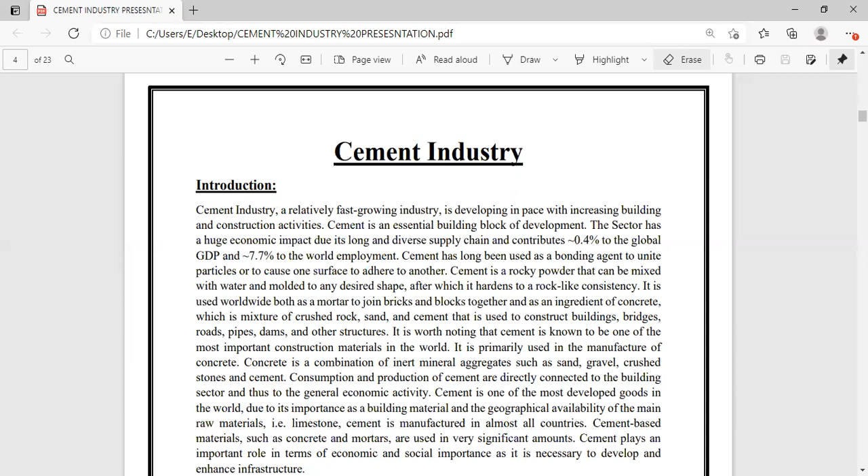Cement has long been used as a bonding agent to unite particles or to cause one surface to adhere to another. Cement is a rocky powder that can be mixed with water and molded to any desired shape, after which it hardens to a rock-like consistency.

It is used worldwide both as a mortar to join bricks and blocks together and as an ingredient of concrete, which is a mixture of crushed rock, sand, and cement, used to construct buildings, bridges, roads, pipes, dams, and other structures. Concrete is a combination of inert mineral aggregates such as sand, gravel, crushed stone, and cement.

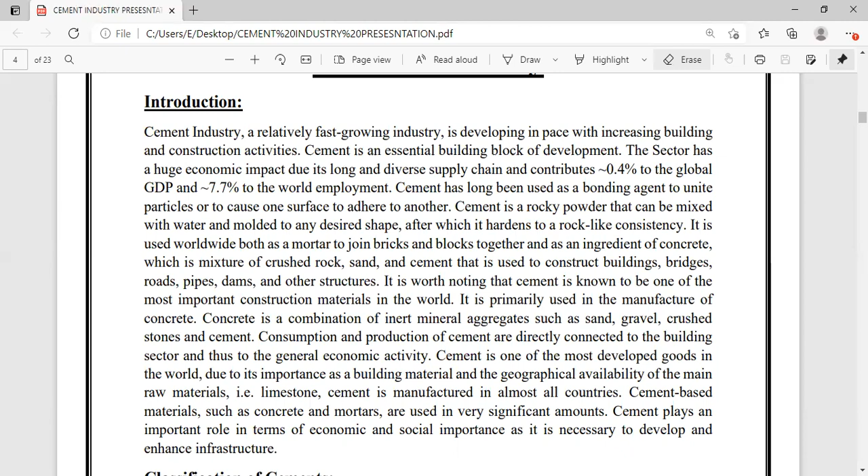Cement is one of the most developed goods in the world due to its importance as a building material and geographical availability of main raw materials. Limestone cement is manufactured in almost all countries.

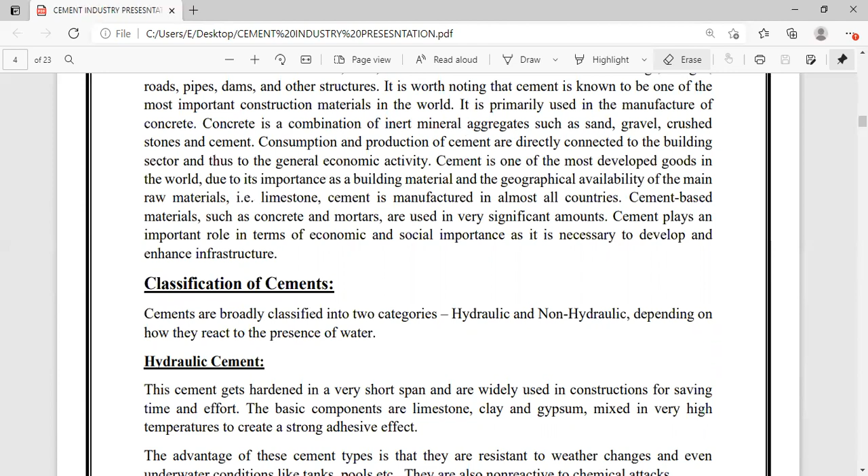Let's move to the topic, the classification of cement. Cements are broadly classified into two categories, hydraulic and non-hydraulic, depending on how they react to presence of water. Hydraulic cement. This cement gets hardened in a very short span and is widely used in construction for saving time and effort. The basic components are limestone, clay, and gypsum mixed at a very high temperature to create a strong adhesive effect.

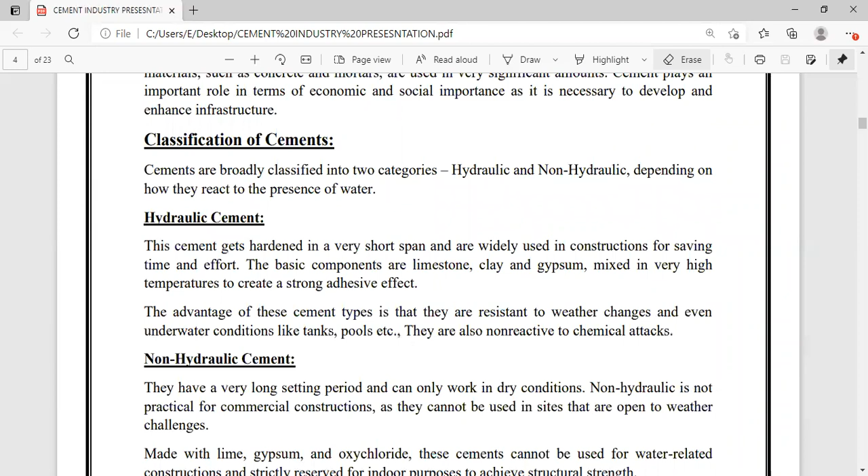The advantage of this cement is its resistance to weather changes and even underwater conditions like tanks, pools, etc. They are also non-reactive to chemical attacks. Non-hydraulic cement. They have a very long setting period and can only work in a dry condition.

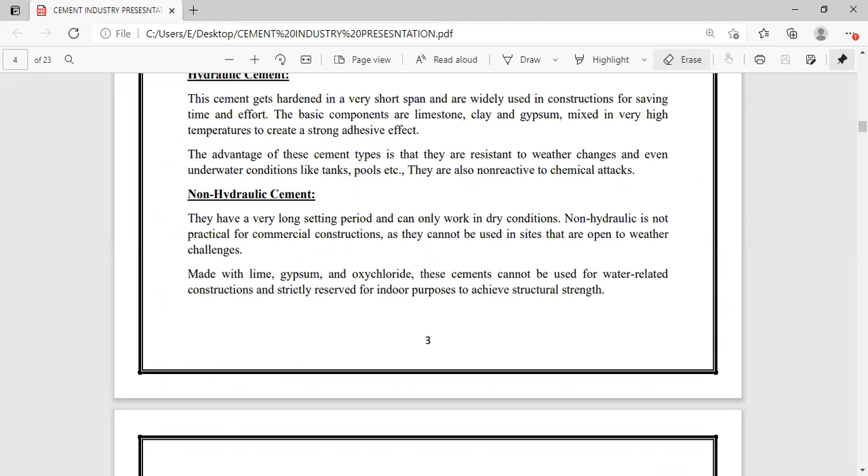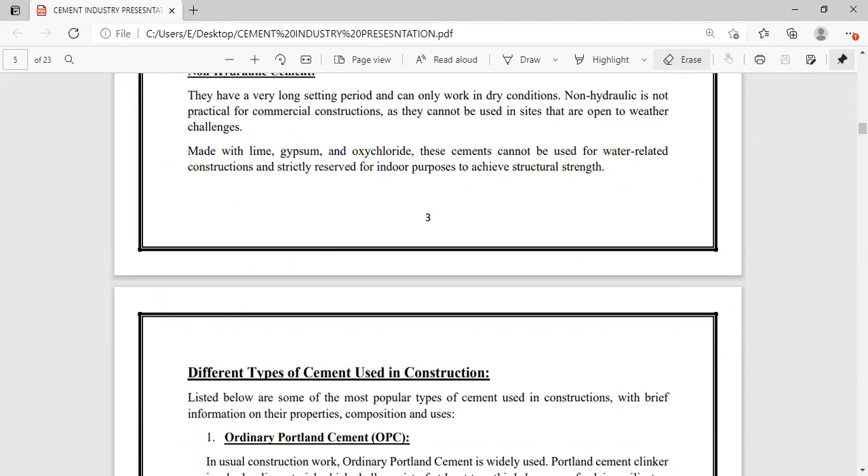Non-hydraulic is not practical for commercial construction as it cannot be used in a site that is open to weather challenges. Made with lime, gypsum, and oxychloride, this cement cannot be used for water-related construction and is strictly reserved for indoor purposes to achieve structural strength.

Let's move to the next topic, the different types of cement used in construction. Listed below are some of the most popular types of cement used in construction with brief information on the properties, composition, and uses. Ordinary Portland cement is used in usual construction work. Ordinary Portland cement is widely used.

Portland cement clinker is a hydraulic material which consists of at least two-thirds by mass of calcium silicate. The remainder consists of aluminium and iron containing clinker phases and other compounds. The ratio of calcium oxide to silicon dioxide shall not be less than 2. The magnesium oxide content shall not exceed 5% by mass.

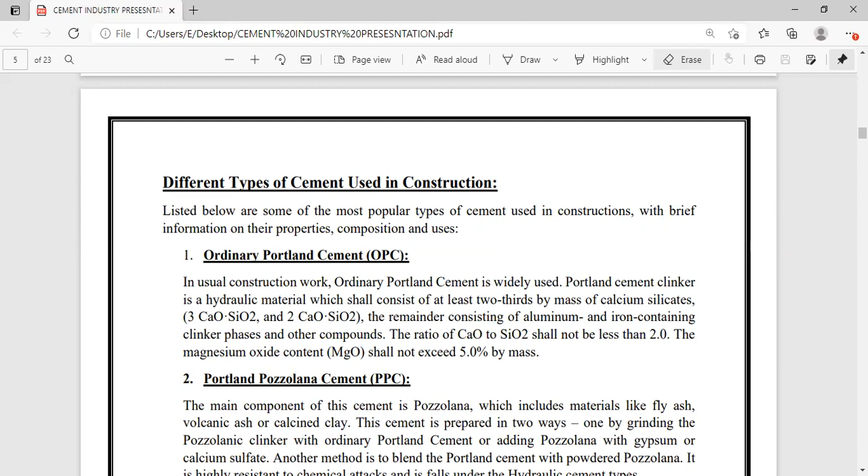Portland pozzolana cement. The main component of this cement is pozzolana, which includes materials like fly ash, volcanic ash, or calcined clay. The cement is prepared two ways: one by grinding pozzolanic clinker with ordinary Portland cement, or adding pozzolana with gypsum or calcium sulfate.

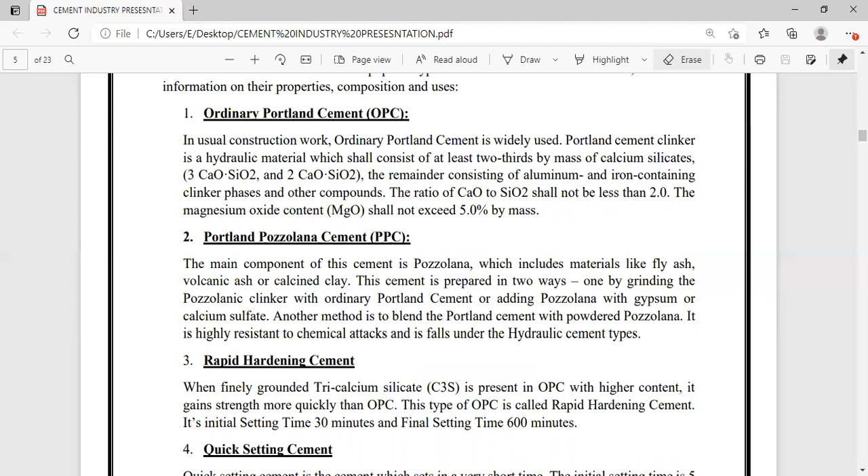Rapid hardening cement. When finely ground, tricalcium silicate is present in OPC with higher content. It gains strength more quickly than OPC. This type of OPC is called rapid hardening cement.

Quick setting cement. Quick setting cement is a cement which sets in a very short time. The initial setting time is 5 minutes and the final setting time is 30 minutes. The composition of quick setting cement is clinker and aluminum sulfate. The aluminum sulfate increases the hydration rate of silicate.

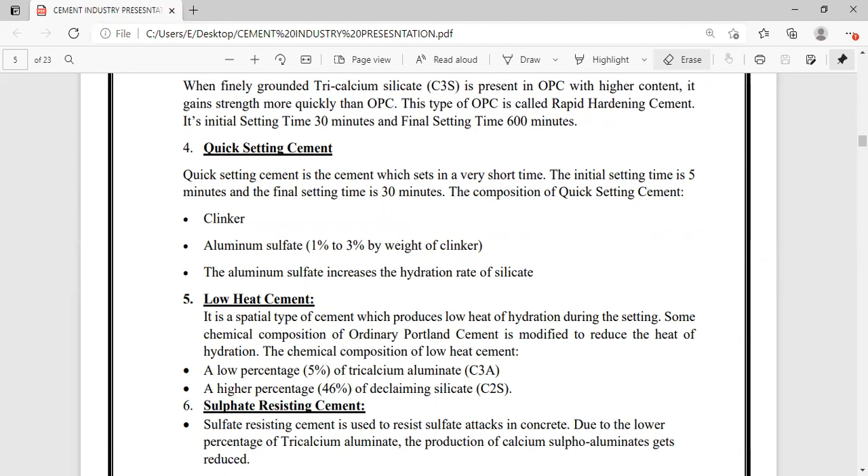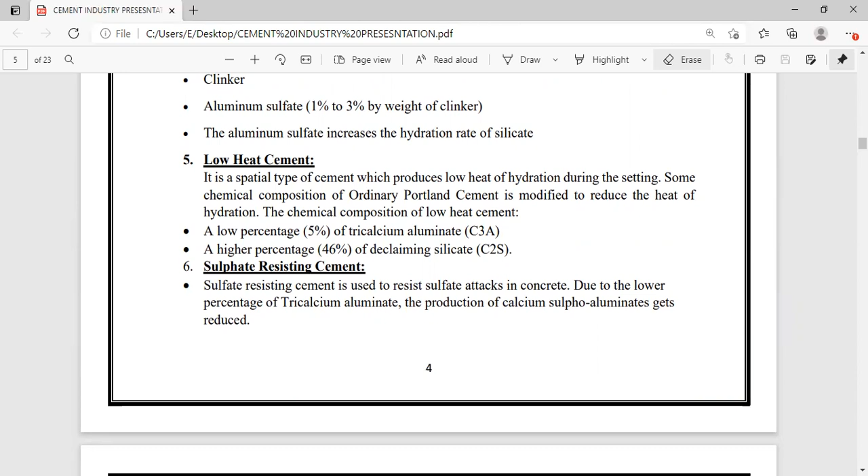Low heat cement is a special type of cement which produces low heat of hydration during setting. Some chemical composition of ordinary Portland cement is modified to reduce the heat of hydration. The chemical composition of low heat cement has a low percentage of tricalcium aluminate and a high percentage of dicalcium silicates.

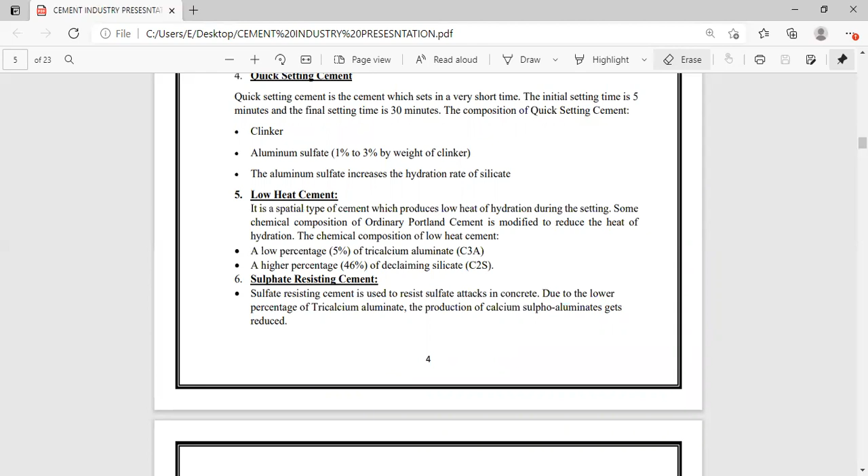Sulfate resistant cement. Sulfate resisting cement is used to resist sulfate attack in concrete due to low percentage of tricalcium aluminate. The production of calcium sulfoaluminate gets reduced. Blast furnace cement. The Portland cement clinkers and granulated blast furnace slags are intergraded to make the blast furnace cement.

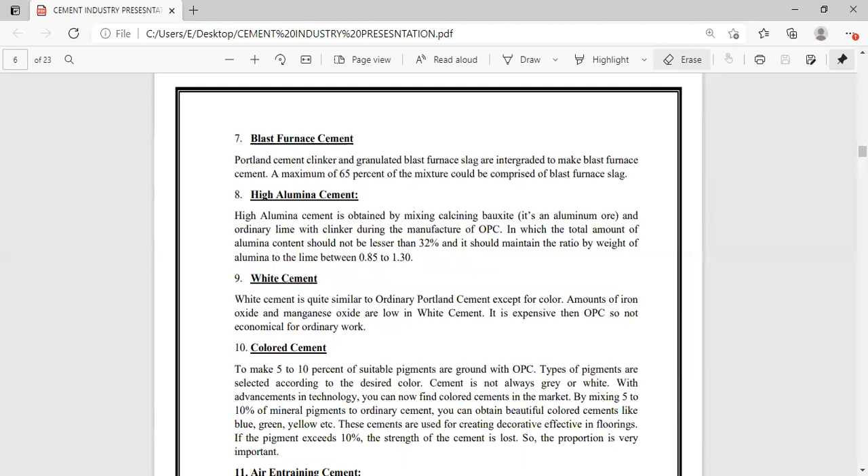High alumina cement. High alumina cement is obtained by mixing calcined bauxite and ordinary lime with clinker during the manufacture of OPC. White cement. The white cement is quite similar to ordinary Portland cement except for the color. The amount of iron oxide and manganese oxide are low in white cement. It is more expensive than OPC, so not economical for ordinary work.

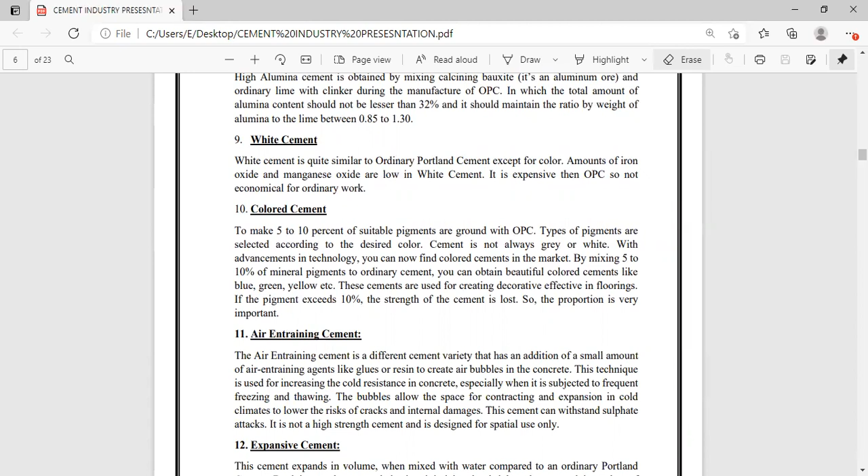Colored cement. To make it, 5 to 10% of suitable pigments are ground with OPC. Types of pigments are selected according to desired color. The cement is not always gray or white.

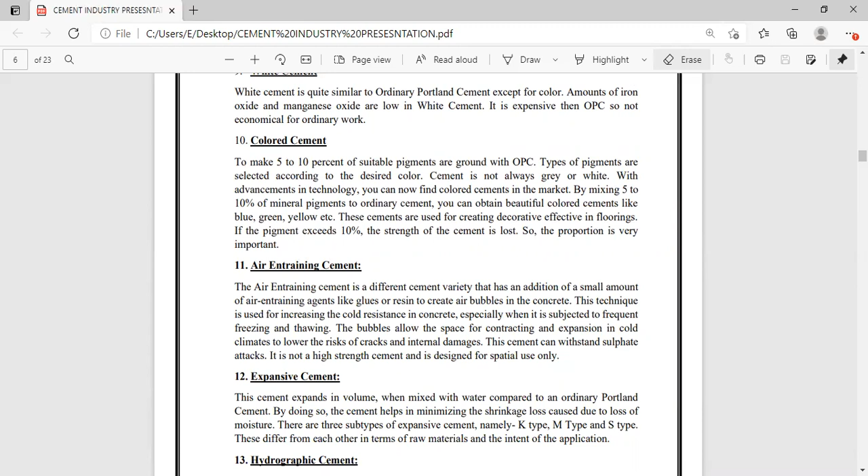With advancement in technology, you can now find colored cement in the market. By mixing 5 to 10% of mineral pigment into ordinary cement, you can obtain beautiful colored cement like blue, green, yellow, etc.

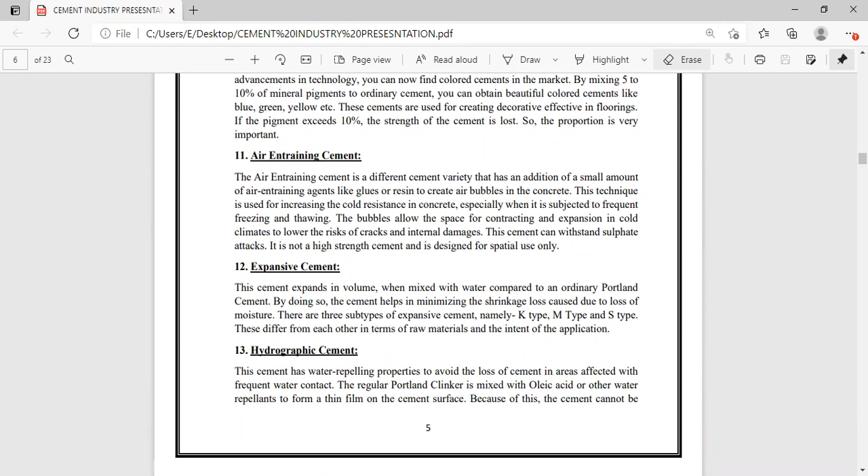Air entraining cement. Air entraining cement is a different cement variety that has an addition of a small amount of air entraining agents like glues or resins to create air bubbles in the concrete. The technique is used for increasing the cold resistance in concrete, especially when it is subjected to frequent freezing and thawing.

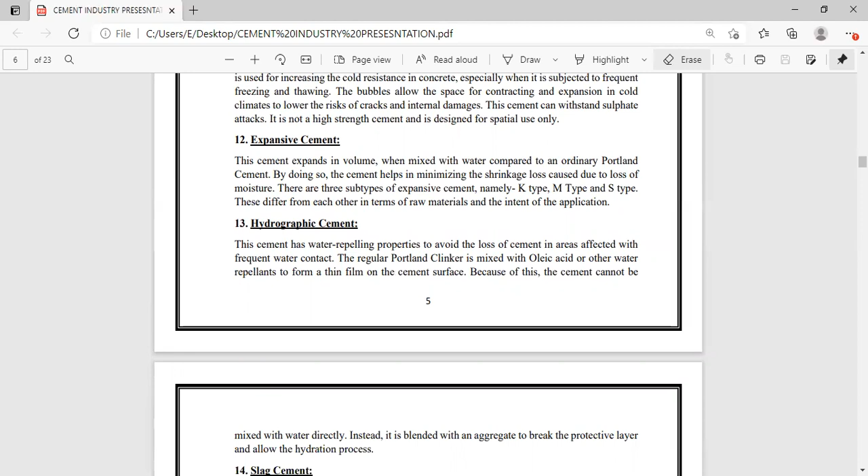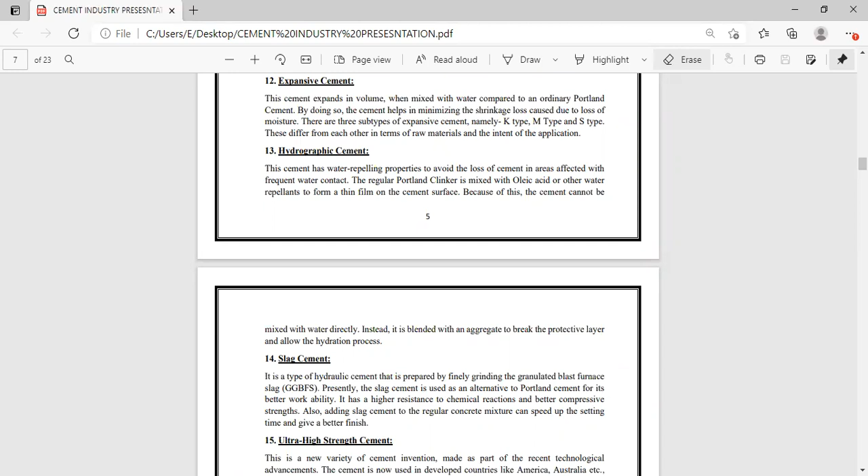Expansive cement. The cement expands in volume when mixed with water compared to ordinary Portland cement. By doing so, the cement helps in minimizing the shrinkage loss caused by the loss of moisture. Hydrophobic cement. This cement has water repelling properties to avoid the loss of cement in areas affected by frequent water contact.

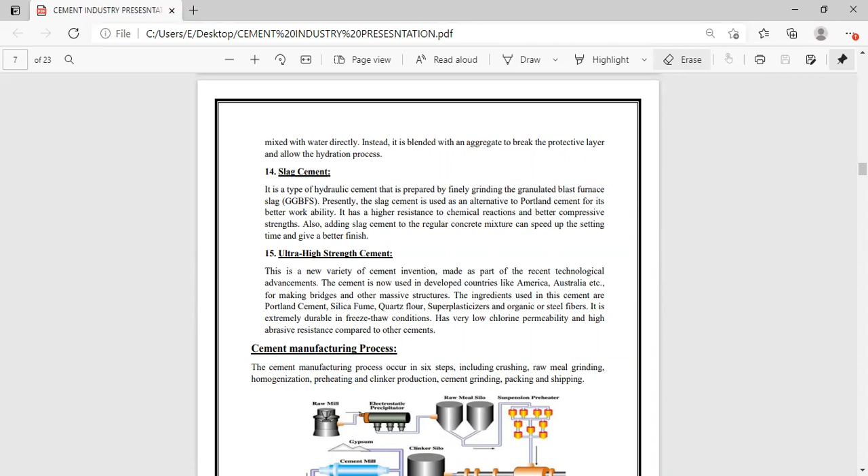Slag cement. It is a type of hydraulic cement that is prepared by finely grinding granulated blast furnace slag. Presently, slag cement is used as an alternative to Portland cement for its better workability. It has a higher resistance to chemicals and better compressive strength.

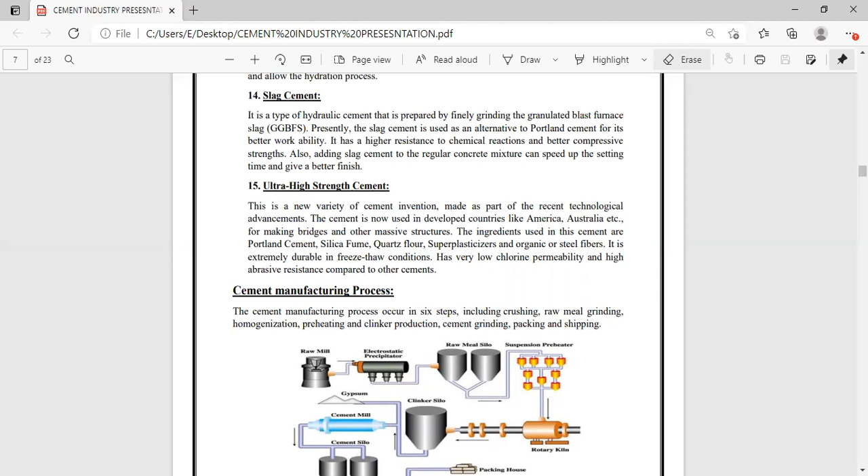Ultra high strength cement. This is a new variety of cement invented as a part of recent technological advancement. The cement is now used in developed countries like America and Australia for making bridges and other massive structures. The ingredients used in the cement are Portland cement, silica fume, quartz flour, superplasticizers, and organic or steel fibers.

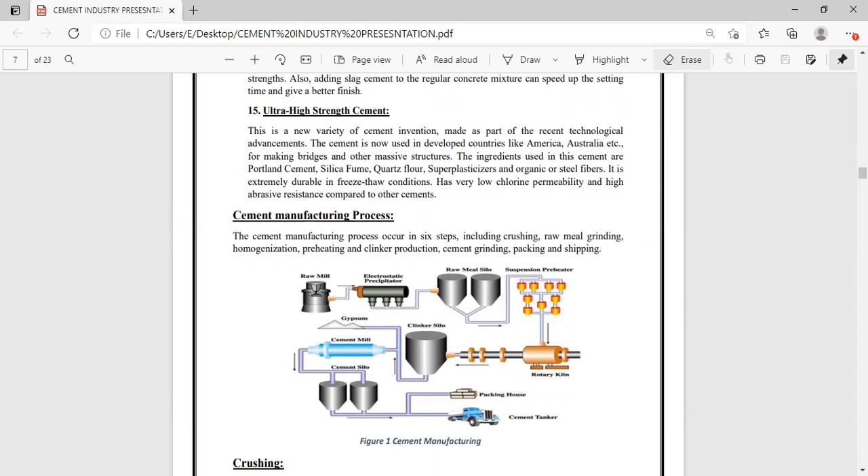Now let's move to the next topic, the cement manufacturing process. The cement manufacturing process occurs in 6 steps, including crushing, raw meal grinding, homogenization, preheating and clinker production, cement grinding, packing, and shipping. Crushing. Crushed limestone and other materials are usually stored overlaid to protect them from the environment and to minimize dust. In most cases, quarries and cement plants require a separate or single power supply.

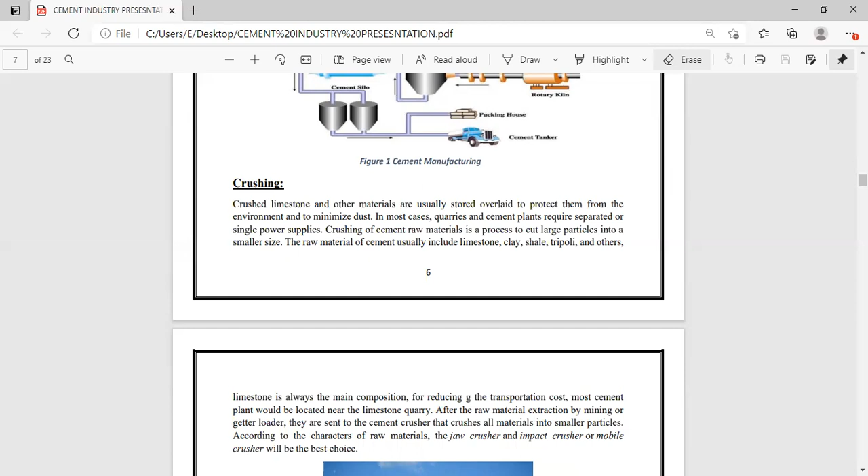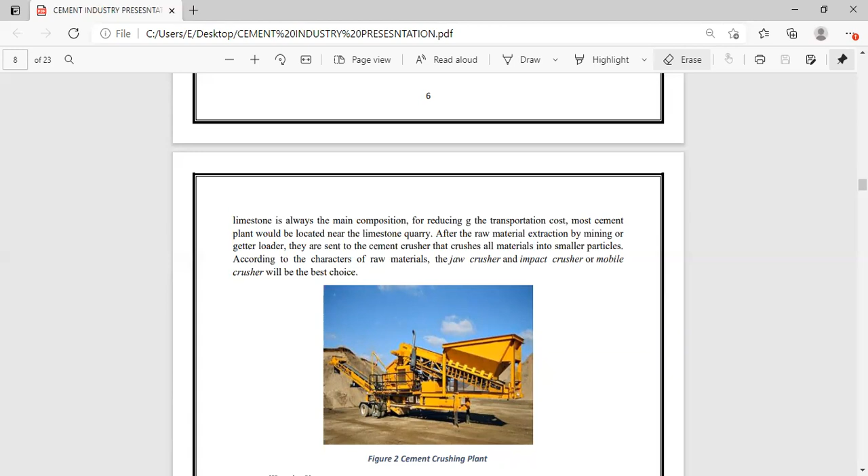The crushing of cement raw material is a process to cut large particles into small sizes. The raw materials of cement include limestone, clay, tripoli, and others. Limestone is always the main component; for reducing transportation costs, most cement plants are located near the limestone quarry. After raw material extraction by mining or loaders, it is sent to cement crushers that crush all material into smaller particles. According to the characteristics of the raw material, jaw crushers and impact crushers are... mobile crushers will be the best choice.

Raw mill grinding. After crushing, the qualified raw material is sent to pre-homogenization, and humid materials are dried first and then sent to pre-homogenization. Pre-homogenization combines the prepared crushed materials and corrective material in a certain proportion. In raw mill grinding production, cement raw materials are ground into a fine size to ensure good mixing. In this stage, there are 2 types of raw mill to choose from. The vertical grinding mill uses pressure from the rollers to crush the passing material. The cement ball mill uses balls to grind the material.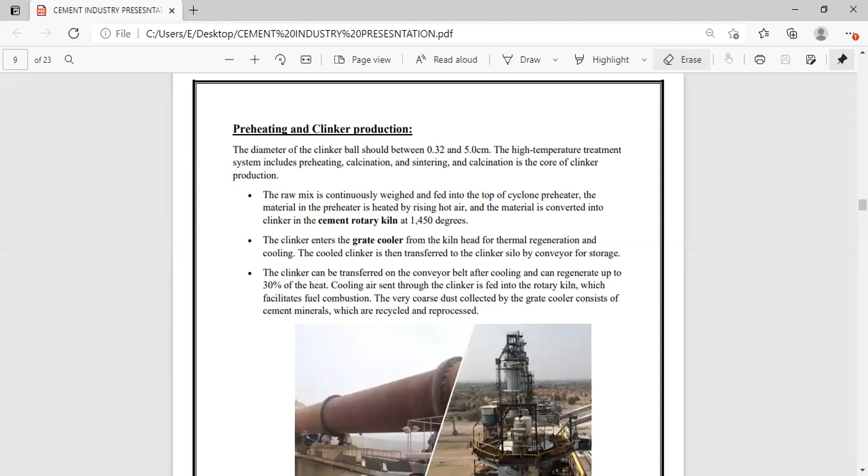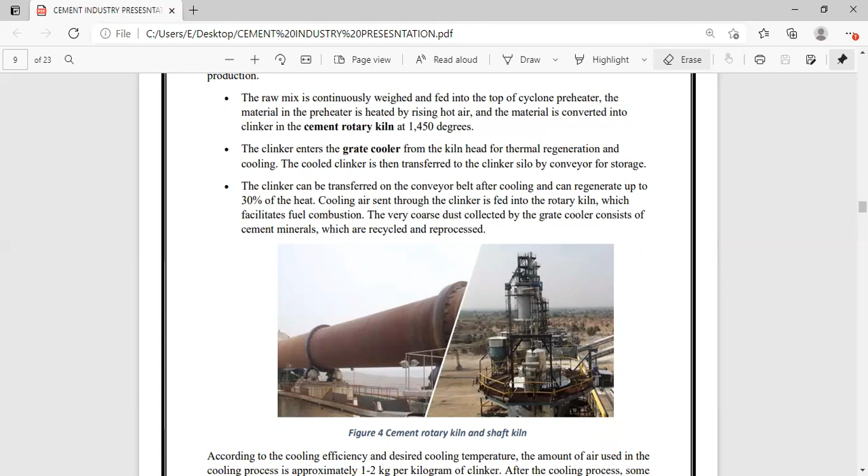The cooled clinker is then transferred to the clinker silo by conveyor for storage. Clinker can be transferred on the conveyor belt after cooling, and up to 30% of the heat can be regenerated. Cooling air sent through the clinker is fed into the rotary kiln, which facilitates fuel combustion. The very coarse dust collected by the grate coolers consist of cement minerals, which are recycled and reprocessed. This is the diagram of a cement rotary kiln and shaft kiln.

According to the cooling efficiency and desired cooling temperature, the amount of air used in the cooling process is approximately 1 to 2 kg per kilogram of clinker. After the cooling process, some of the gas is used in other processes, such as coal drying, so the amount of gas that needs to be cleaned can be reduced.

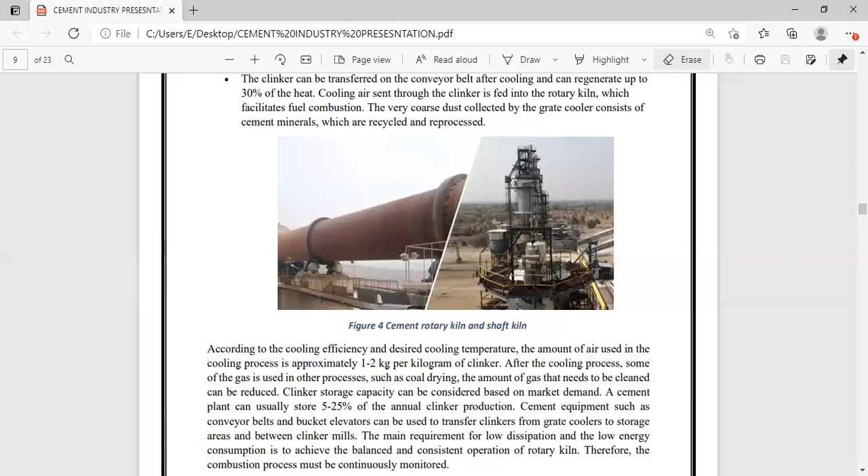Clinker storage capacity can be determined based on market demand. The cement plant can usually store 5 to 25% of annual clinker production. Cement equipment such as conveyor belts and bucket elevators can be used to transfer clinker from grate coolers to the storage areas and between the clinker mills.

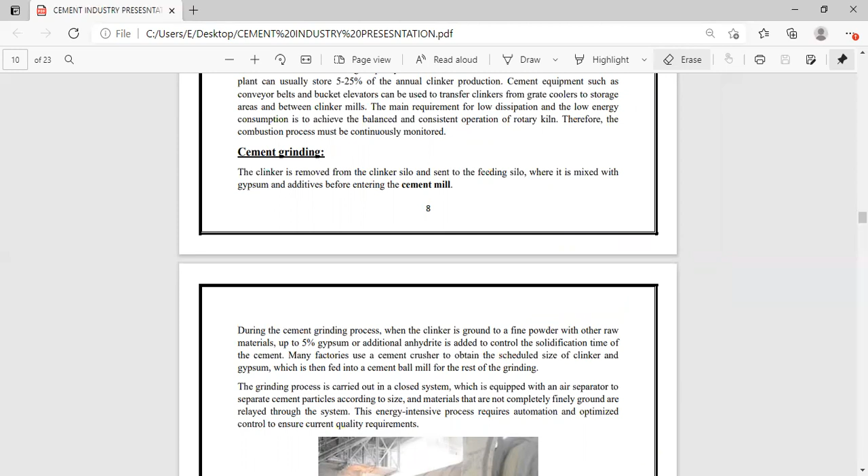Cement grinding. The clinker is removed from the clinker silo and sent to the feeding silo where it is mixed with gypsum and additives before entering the cement mill. During the cement grinding process, when the clinker is ground to fine powder with the other raw material, up to 5% gypsum or additional anhydrite is added to control the solidification time of the cement.

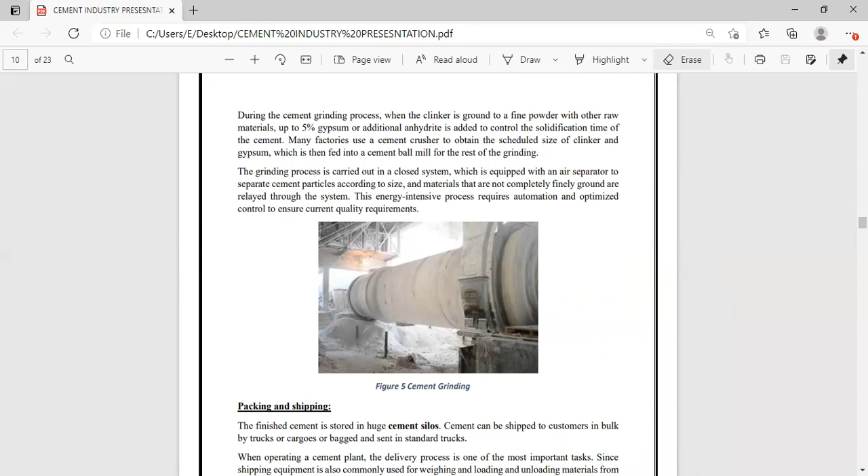Manufacturers use cement crushers to obtain the scheduled size of clinker and gypsum, which is then fed into the cement ball mill for the rest of grinding. The grinding process is carried out in a closed system, which is equipped with air separators to separate the cement particles according to size. Materials that are not completely finely ground are recycled through the system.

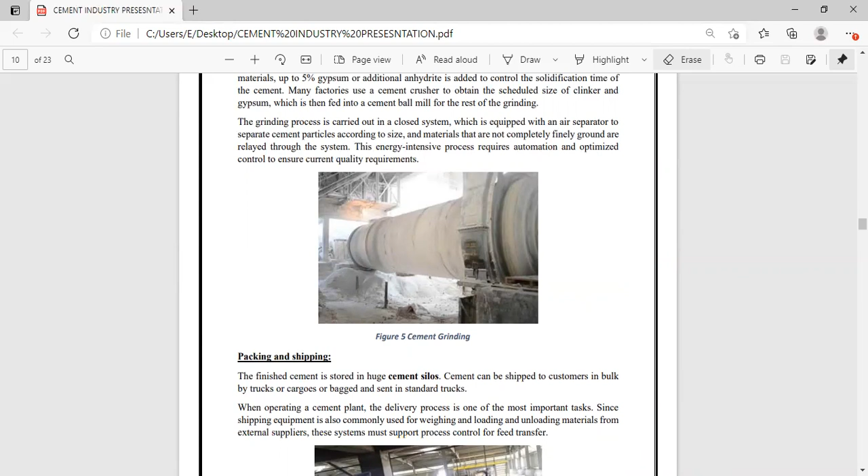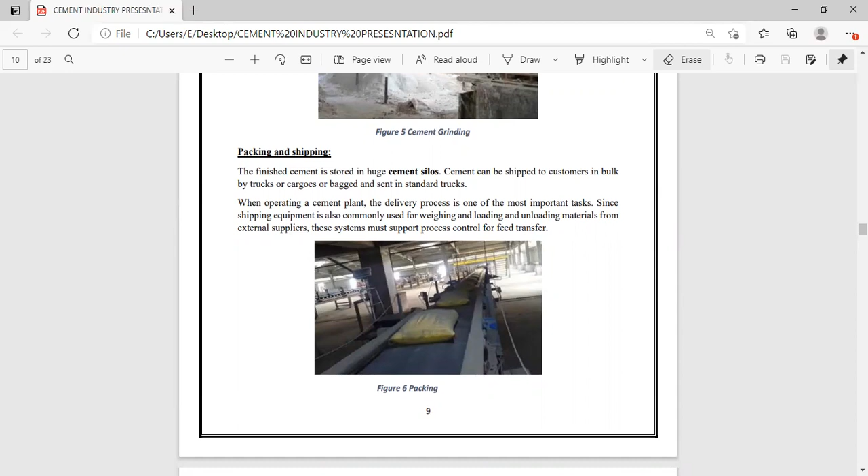This is the diagram for cement grinding, packing, and shipping. The finished cement is stored in huge cement silos. Cement can be shipped to customers in bulk by truck or cargo, or bagged and sent in standard trucks. When operating a cement plant, the delivery process is one of the most important tasks since the shipping equipment is commonly used for weighing, loading, and unloading the materials from external suppliers. This system must support process control for the feed transfers.

Let's move to the next topic, emission from cement manufacturing. Cement manufacture causes environmental impact at all the stages of the process. These include the emission of airborne pollution in the form of dust, gases, noise, and vibration when operating the machinery and during blasting in quarries, and limestone quarries are visible from long distance and may permanently disfigure the local environment. Cement is one of the most polluting industries. 5% of the world total emission of greenhouse gas is caused by cement.

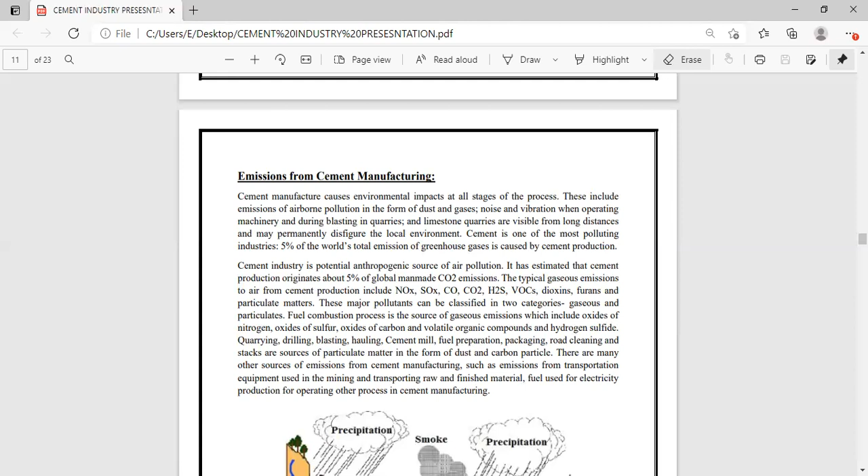The cement industry is a potential anthropogenic source of air pollution. It is estimated that cement production originates about 5% of global man-made carbon dioxide emission. Typical gaseous emissions to air from cement production include nitrogen oxide, sulfur oxide, carbon dioxide, carbon monoxide, volatile organic compounds and particulate matter. The major pollutants can be classified into two categories, gaseous and particulates. Fuel combustion is a source of gaseous emission, which includes oxides of nitrogen, oxides of sulfur, oxides of carbon, volatile organic compounds and hydrogen sulfide.

What are the environmental and health impacts of the emission? Air pollution from cement manufacturing is becoming an important environmental problem worldwide. Recent studies determine the relationship between cement air pollution and human health disease. Sulfur oxide. The oxides of sulfur are formed from the combustion of fuel which contains sulfur and oxidation of sulfur-containing raw materials. Sulfur is present in the cement raw materials.

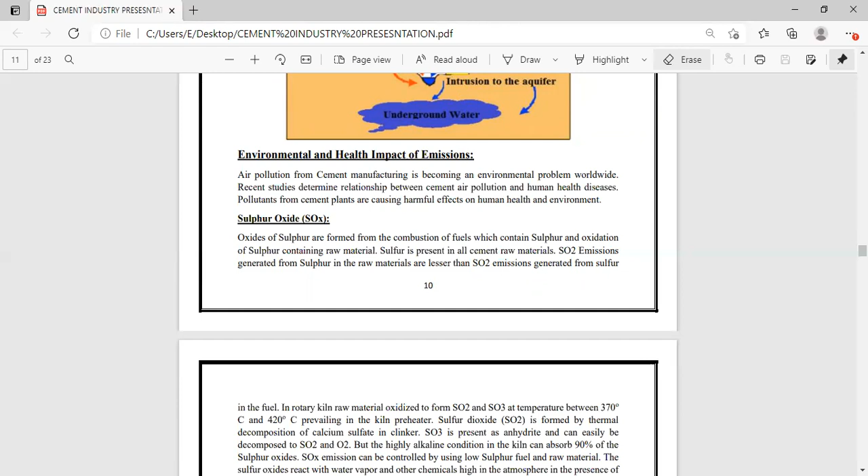Sulfur dioxide emissions generated from sulfur in raw materials are lesser than the sulfur dioxide emissions generated from sulfur in the fuel. In rotary kilns, the raw material is oxidized to form sulfur dioxide and sulfur trioxide at a temperature between 370 and 420 degrees Celsius, prevailing in the kiln preheaters. Sulfur dioxide is formed by thermal decomposition of calcium sulfate in clinker, and sulfur trioxide is present as an anhydride and can easily be decomposed to sulfur dioxide and oxygen. But the highly alkaline conditions in the kiln can absorb 90% of the sulfur oxides.

Sulfur oxides react with water vapors and other chemicals high in the atmosphere in the presence of sunlight to form sulfuric acid. These acids usually dissolve in suspended water droplets which can be washed from the air onto the soil by rain or snow. This is known as acid rain. It is responsible for much damage to life and health. Respiratory diseases such as bronchitis are seen to increase with sulfur dioxide levels. Increased levels of sulfur oxide in the atmosphere can also degrade agricultural productivity and cause death of some plants.

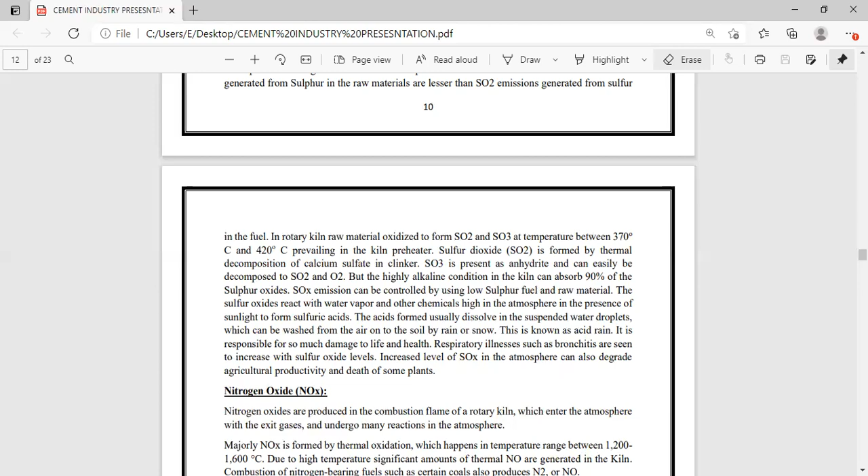Nitrogen oxide. Nitrogen oxides are produced in the combustion flame of rotary kilns, which enter the atmosphere with the exhaust gases and undergo transformation in the atmosphere. Majorly, nitrogen oxide is formed by thermal oxidation, which happens in a temperature range between 1200 to 1600 degrees Celsius. Due to high temperatures, significant amounts of thermal nitrogen oxide are generated in a kiln. Combustion of nitrogen-bearing fuels such as certain coal also produces NO, and this is the reaction. As the temperature increases, NO formation also increases. About 90% of nitrogen oxides are produced in the form of nitric oxide, and the remaining 10% are in the form of nitrogen dioxide.

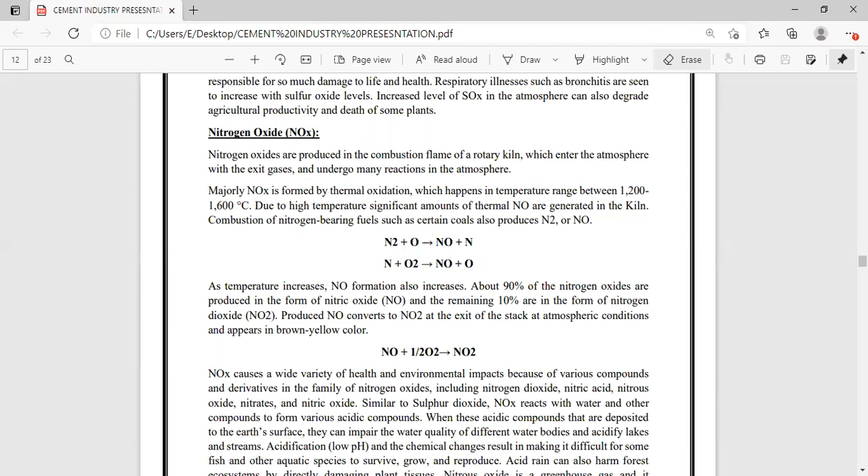Nitrogen oxide causes a wide variety of health and environmental impacts because of various compounds and derivatives in the family of nitrogen oxides, including nitrogen dioxide, nitric acid, nitrous oxide, nitrates, and nitric oxide. Similarly to sulfur dioxide, nitrogen oxide reacts with water and other compounds to form various acidic compounds. When these acidic compounds are deposited to the surface, they impair the water quality of different water bodies and acidify lakes and streams.

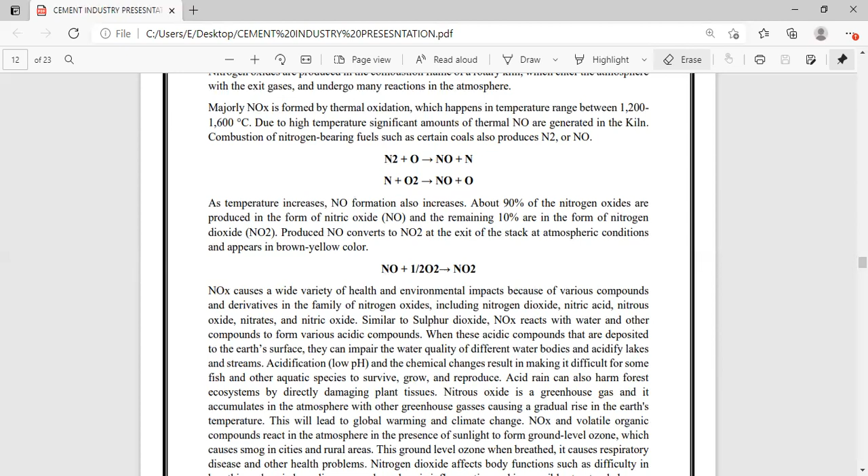Acidification and chemical changes make it difficult for some fishes and other aquatic species to survive, grow, and reproduce. Acid rains can also harm the forest ecosystem by directly damaging the plant tissues. Nitrous oxide is a greenhouse gas and accumulates in the atmosphere with other greenhouse gases, causing a gradual rise in earth temperature. This will lead to global warming and climate change.

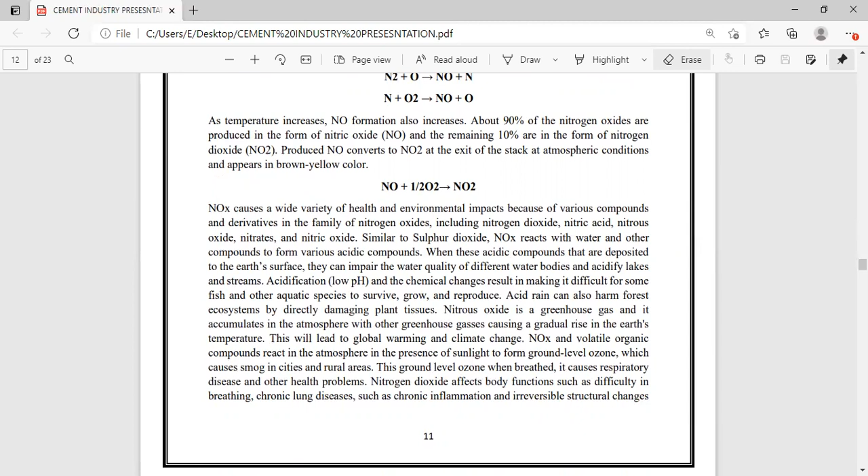Nitrogen oxide and volatile organic compounds react in the atmosphere in the presence of sunlight to form ground level ozone, which causes smog in cities and rural areas. Carbon dioxide and carbon monoxide. The cement industry is a major source of carbon dioxide emission. Carbon dioxide is emitted from the calcination process of limestone and from the combustion of fuels in the kiln. It is estimated that half of the carbon dioxide is generated from fuel combustion and half originates from decarbonization of raw material.

An indirect source of carbon dioxide and other pollutants in cement production is the consumption of electricity, assuming that electricity is generated from fossil fuels. The amount of carbon dioxide released in calcination can be calculated from component formula weight ratios for the limestone. Carbon dioxide emission from different fuels' combustion can be calculated from emission factors of fuel defined by the Intergovernmental Panel on Climate Change. The amount of carbon dioxide emission during this process is directly related to the type of fuel used, like coal, fuel oil, petcoke, natural gas, alternate fuel.

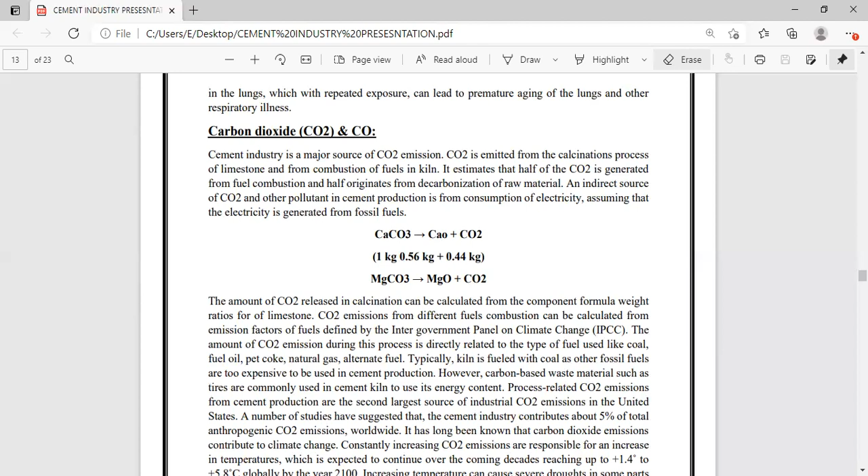However, carbon waste materials such as tires are commonly used in cement kilns for their energy content. Process-related carbon dioxide emissions from cement production are the second largest source of carbon dioxide emission in the United States. A number of studies suggested the cement industry contributes about 5% of total anthropogenic carbon dioxide emission worldwide. It has long been known that carbon dioxide emissions contribute to climate change. Constantly increasing carbon dioxide emissions are responsible for an increase in temperature, which is expected to continue over the coming decades, reaching up to 1.4 to 5.8 degrees Celsius globally by the year 2100.

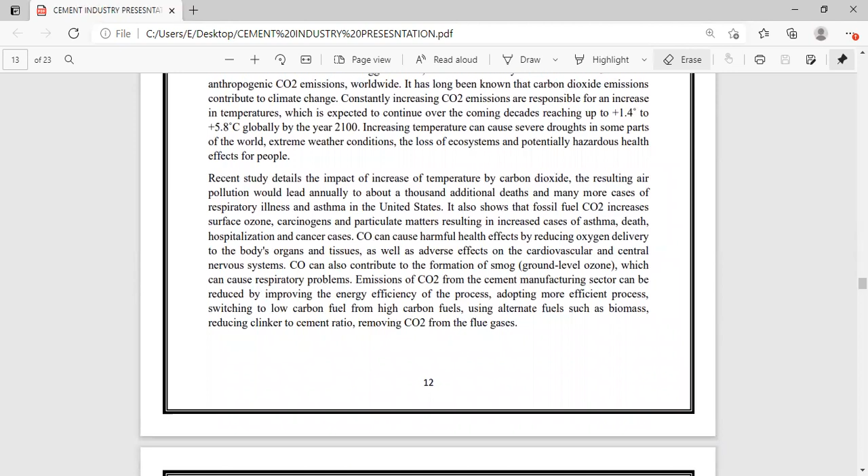Increasing temperatures can cause severe drought in some of the world, extreme weather conditions, the loss of ecosystems, potential health hazards, and other effects. Carbon monoxide can cause harmful health effects by reducing oxygen delivery to the body organs and tissue, as well as adverse effects on the cardiovascular and central nervous system. Carbon monoxide can also contribute to the formation of smog, which can cause respiratory problems. The emission of carbon dioxide from cement manufacturing sectors can be reduced by improving the energy efficiency of the process, adopting more efficient processes, etc.

Particulate matter. Particulate matter is emitted from quarrying, crushing, grinding of raw materials and clinker, fuel preparation, clinker grinding, and cement packaging. Particulate matter consists of fine particles that can remain suspended in air, which include dust, soot, and liquid droplets. Particulate emissions contain potentially harmful toxic metals and compounds such as lead, chromium, nickel, barium, which can pose a serious impact on human health. The emissions are toxic as they carry carcinogens, mutagens, immunotoxins, respiratory toxins, neurological toxins, etc.

The main route of entry of these particles in the body is the respiratory tract or gastrointestinal tract, or both, by inhalation and swallowing. When particulate matter is inhaled, it penetrates deep into the respiratory system, and particulate matter less than 2.5 micrometers goes into the lung and passes into the bloodstream. It is determined that short-term exposure to particulate matter significantly increases the risk for cardiovascular and respiratory disease. Particulate matter can also cause eye and throat irritation, bronchitis, lung damage, increased mortality rates, increased heart ailments.

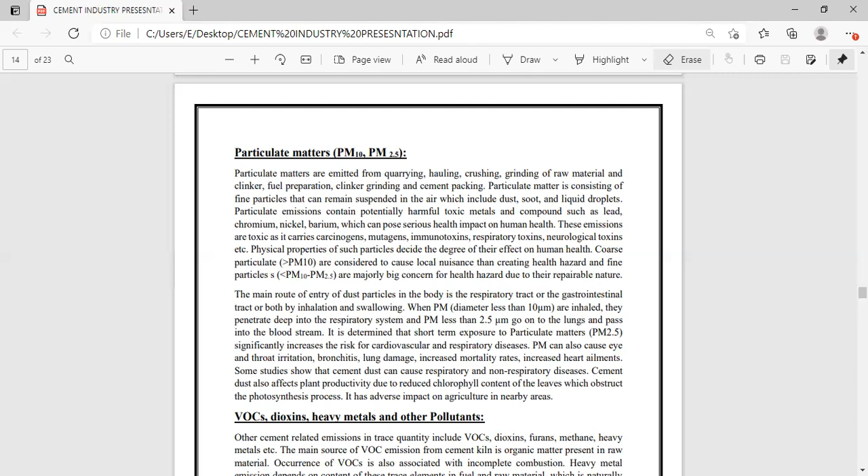Volatile organic compounds, dioxin, heavy metals, and other pollutants. Other cement-related emissions in trace quantity include volatile organic compounds, dioxin, furan, methane, heavy metals. The main source of volatile organic compound emission from cement kilns is organic matter present in raw material. Occurrence of volatile organic compounds is also associated with incomplete combustion. Volatile organic compounds are precursors to ozone formation, and can also contaminate the soil and groundwater. It has been identified that volatile organic compounds can cause retardation of plant growth, chlorosis, and necrosis in broadleaf plants.

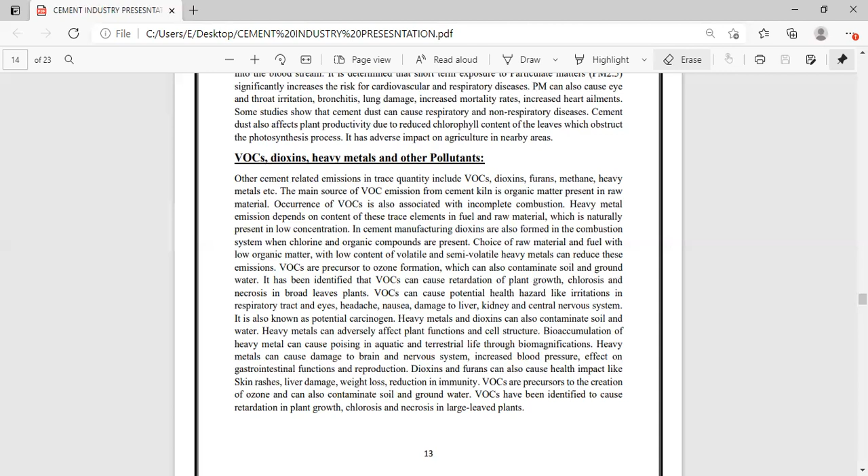Volatile organic compounds can cause potential health hazards like irritation of the respiratory tract and eyes, headache, damage to liver, kidney, and central nervous system. Heavy metals can affect plant functions and cell structure. Bioaccumulation of heavy metals can cause poisoning in aquatic and terrestrial life through biomagnification. Heavy metals can cause damage to the brain and nervous system, increase blood pressure, and affect gastrointestinal function and reproduction. Furans can also cause health impacts like skin rashes, liver damage, weight loss, and reduction in immunity.

Global warming and climate change, the role of the cement industry. The cement industry has been a major player in global warming and currently still is. Why? It is because the manufacturing process generates a lot of carbon dioxide, most of which cannot be harnessed. Before the industrial era, atmospheric carbon dioxide was around 200 ppm. It is now projected to hit 800 ppm by the end of the 21st century.

Cement production is thought to contribute 5 to 10% of global anthropogenic carbon dioxide emissions. About 40% of the carbon emissions from cement manufacturing come from combustion of fossil fuels in the kiln process, while 50% come from roasting of limestone. Several methods of mitigating air pollution and fostering sustainable manufacture in the cement industry have been evaluated in open literature in recent times.

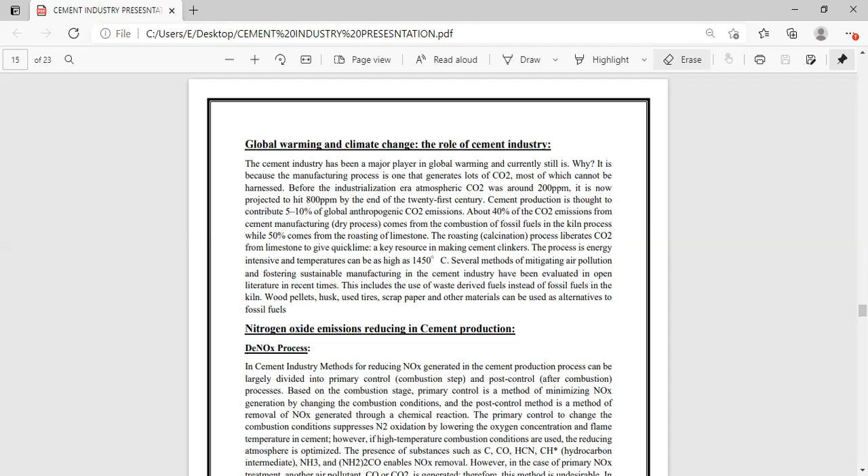Nitrogen oxide emission reduction in cement production. In the cement industry, methods for reducing the nitrogen oxide generated in the cement production process can be largely divided into primary control and post-control processes based on the combustion stage. Primary control is a method of minimizing nitrogen oxide generation by changing the combustion conditions, and post-control is a method of removal of nitrogen oxide generated through chemical reaction.

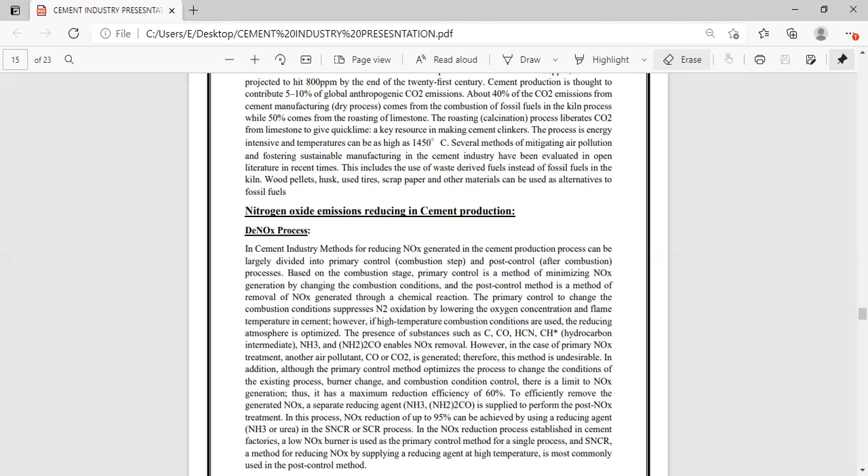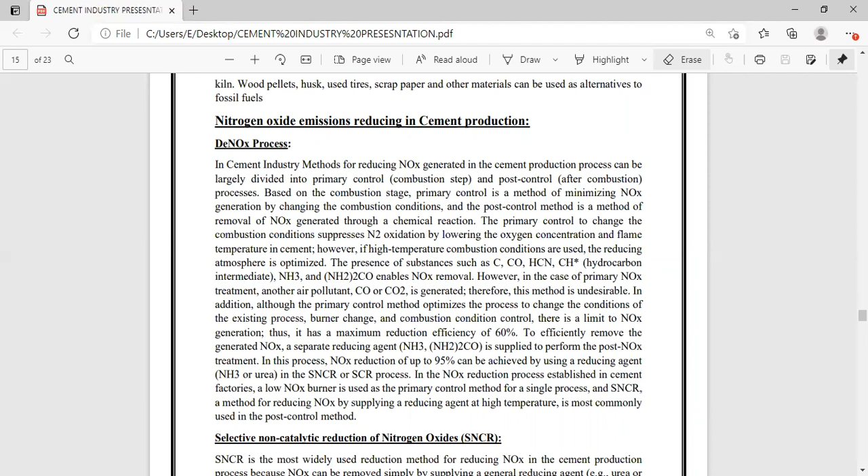The primary control changes the combustion condition and suppresses nitrogen oxidation by lowering the oxygen concentration and flame temperature in cement. In the case of primary nitrogen oxide treatment, another air pollutant, carbon monoxide or carbon dioxide, is generated. Therefore, this method is undesirable. In addition, although the primary control method optimizes the process by changing the combustion conditions, there is a limit, thus it has a maximum reduction efficiency of 60%.

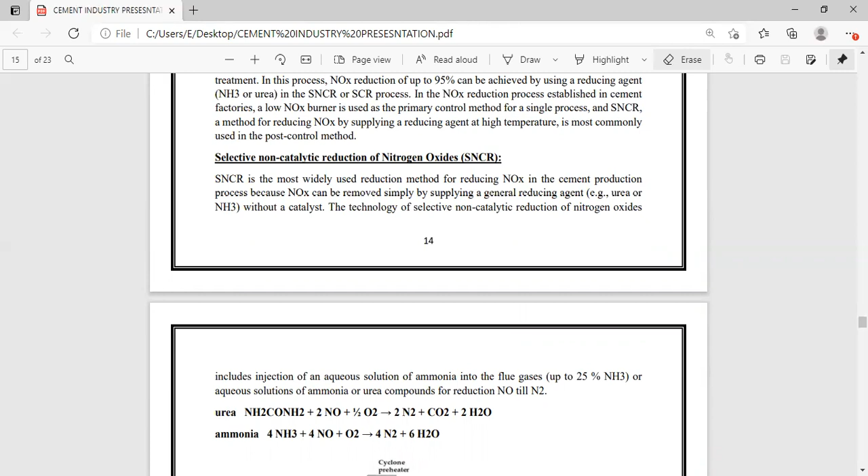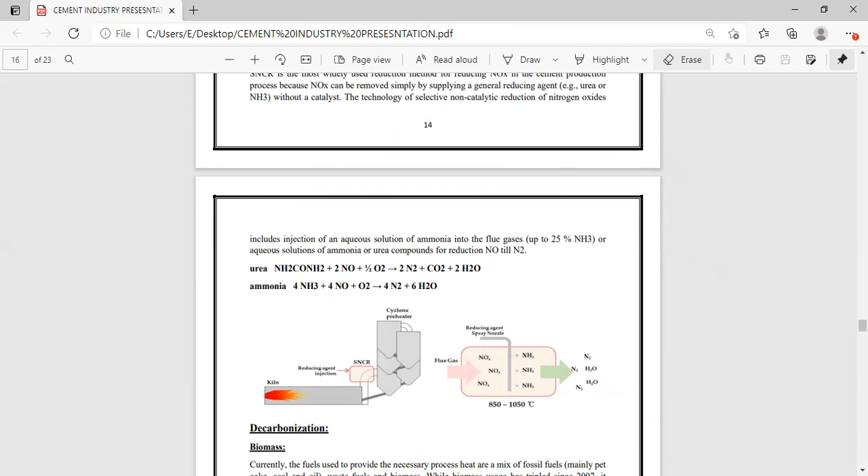So the first method for nitrogen oxide removal: selective non-catalytic reduction of nitrogen oxide, SNCR. SNCR is the most widely used method for reducing nitrogen oxide in the cement production process because nitrogen oxide can be removed simply by supplying general reducing agents, urea or ammonia, without a catalyst. The technology includes the injection of aqueous ammonia solution, up to 25% ammonia, or urea compounds into the flue gases for the reduction of nitrogen oxide. This is a diagram for SNCR.

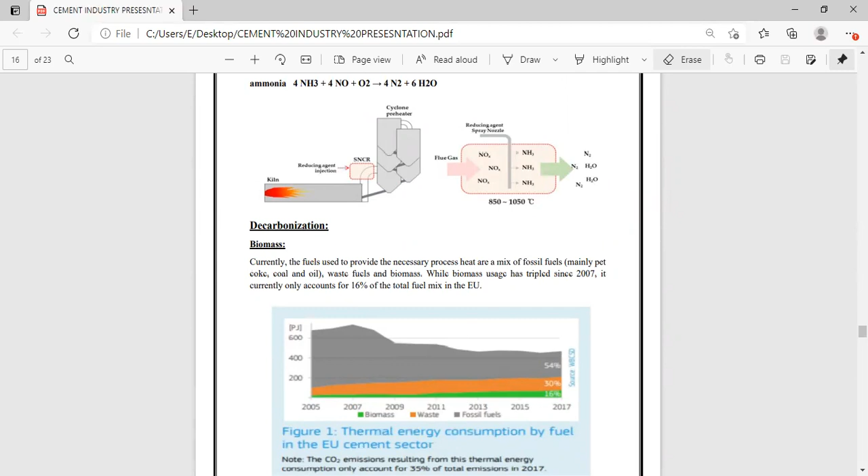Decarbonization. Biomass: currently the fuels used to provide the necessary process heat are a mix of fossil fuels, waste fuels, and biomass. While biomass usage has tripled since 2007, it currently only accounts for 16% of the total fuel mix in the EU. Co-processing of fuel currently represents nearly half of the fuel used in the EU cement industry, with some cement plants reaching occasional substitution rates of 100%.

There are, however, considerable differences between member states in national average co-processing rates, ranging from 6% in Greece to 65% in Germany. While alternative fuels could provide 100% of thermal energy, substitution of fossil fuels with truly sustainable biomass is technically challenging due to the lower calorific value of most organic materials. Moreover, by 2050, competing claims for biomass from other sectors of the economy will limit its availability for cement production.

Electrification of heat, using electricity to provide the process heat, could contribute to decarbonizing the sector if the electricity is 100% fossil fuel free. The cement industry is exploring several technologies to electrify cement production, including generating heat via plasma generators and microwave energy, which have yet to be developed beyond the laboratory. The construction of a pilot plant that uses plasma technology is currently being investigated. An important benefit of electrified heating is a much higher concentration of carbon dioxide in flue gases than with combustion heating, from an estimated 25% to close to 100%.

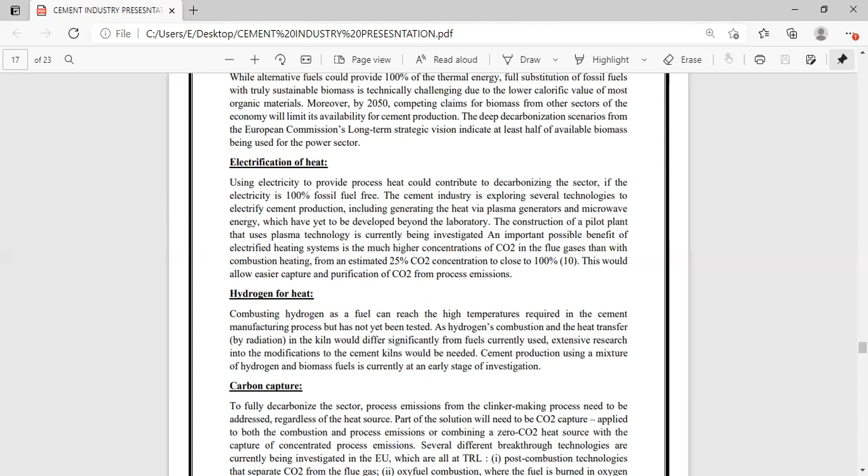Hydrogen for heat. Combusting hydrogen as a fuel can reach the high temperatures required in the cement manufacturing process, but has not been tested, as hydrogen combustion and heat transfer in the kiln would differ significantly from fuels currently used. Extensive research into modifications to the cement kiln would be needed.

Then carbon capture. To fully decarbonize the sector, the process emissions from clinker making need to be addressed regardless of the heat source. Part of the solution will be carbon dioxide capture applied to both the combustion and process emissions, or combining a zero carbon dioxide heat source with the capture of concentrated process emissions.

Several different breakthrough technologies are currently being investigated in the EU, at various TRLs: post-combustion technologies that separate carbon dioxide from flue gases; oxy-fuel combustion, where the fuel is burned in oxygen rather than air, providing a much higher concentration of carbon dioxide in the flue gases; calcium looping, which can be integrated into the cement plant or used as a tail-end technology; and direct separation technology applied in combination with a zero carbon dioxide heat process.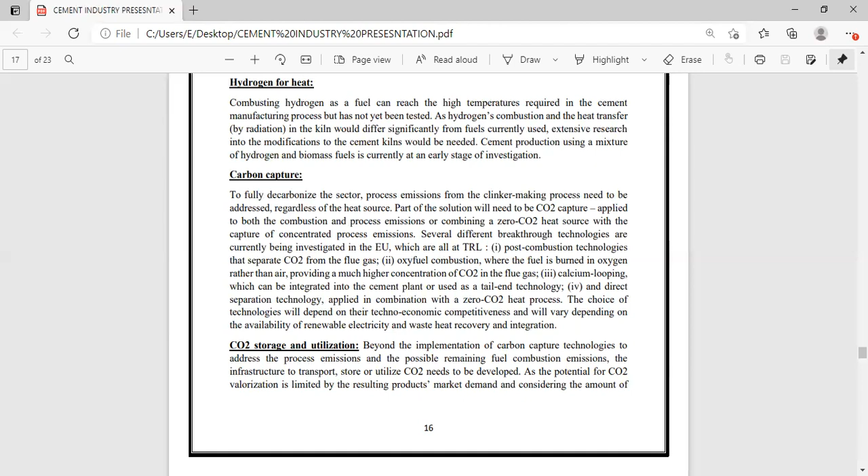Carbon dioxide storage and utilization. With the contemplated implementation of carbon capture technologies to address the process emissions and possible remaining fuel combustion emissions, the infrastructure to transport, store, or utilize the carbon dioxide needs to be developed.

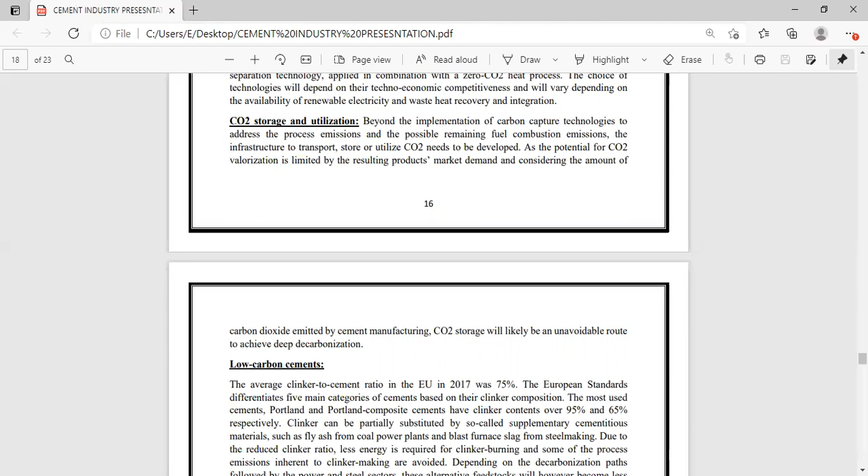Low carbon cement. The average clinker to cement ratio in the EU in 2017 was 75%. European standards differentiate five main categories of cement based on their clinker composition. The most used cements, Portland and Portland composite cement, have clinker contents of 95% and 65% respectively. Clinker can be partially substituted by so-called supplementary cementitious materials such as fly ash from coal power plants and blast furnace slag from steel making.

Next, let's move to the next topic, the techniques for carbon dioxide reduction in the cement industry. The cement and concrete industry searches for a way to meet the increasing demand while reducing the carbon footprint of the concrete produced. Techniques such as carbon capture and storage, material substitution, alternative fuels, and energy efficient technologies have been identified as some of the approaches to produce more sustainable cement.

Carbon capture and storage. Carbon capture and storage technologies, including absorption, membrane-based processes, mineral carbonation, and the use of oxyfuel, have been studied as one of the prominent solutions to minimize carbon dioxide emission in the atmosphere. Modified cement products such as carbon dioxide concrete and several other new technologies, including Solidia technology, Carbicrete, and CarbonCure, are being examined to minimize the carbon dioxide emission from cement production, thereby making cement a sustainable construction material.

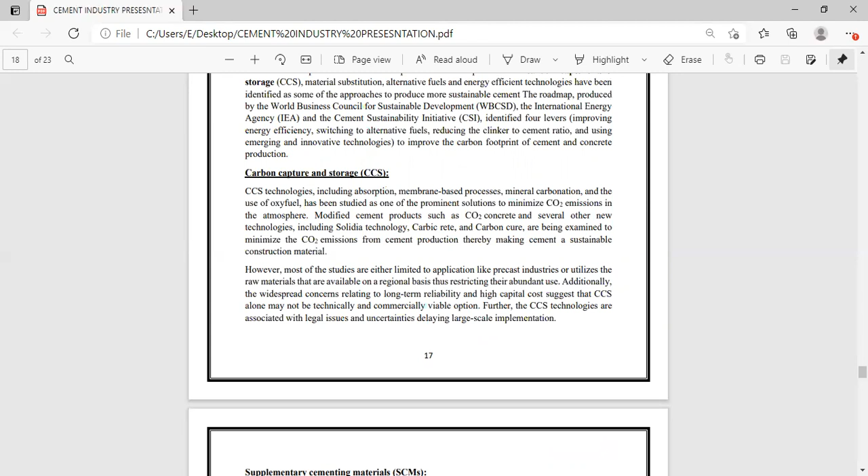Supplementary cementing materials. Another commonly used approach is material substitution. SCMs such as fly ash, slags, limestone powder, silica fume, and RHA have been used to partially replace OPC. These materials help in improving the performance of concrete either by pozzolanic or by cementitious reaction. However, all these SCMs come with their own limitations.

Fly ash is one of the widely used SCMs that helps in improving the durability factors of concrete, especially alkali-silica reactions; the future availability of fly ash, however, has already been a concern. Limestone dust is another widely used SCM, especially in European countries. The reduced later age strength; however, it limits the substitution levels above 15%.

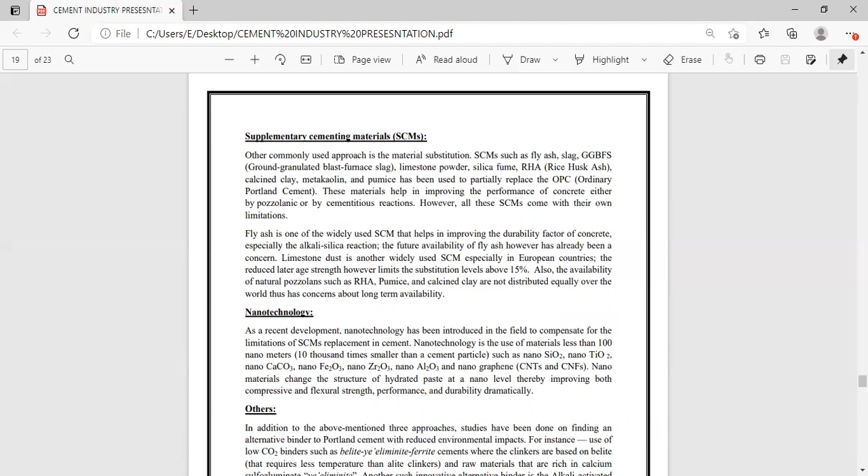Nanotechnology. As a recent development, this technology has been introduced in the field to compensate for the limitations of SCM replacement in cement. Nanotechnology is the use of nanomaterials such as nano SiO2, nano CaCO3, nano Fe2O3, nano ZrO2, nano Al2O3, and nano graphene. Nanomaterials change the structure of the hydrated paste at the nano level, thereby improving compressive and flexural strength, performance, and durability dramatically.

Others. In addition to the above mentioned three approaches, studies have been done on finding alternative binders to Portland cement with reduced environmental impact. For instance, the use of low carbon dioxide binders such as belite calcium sulfoaluminate ferrite cement, where the clinkers are based on belite and raw materials that are rich in calcium.

Another alternative binder is alkali activated binders, which commonly consist of two elements, a cementitious component and alkaline activators. Different industrial byproducts and aluminosilicate raw materials are used as the cementitious material, and sodium silicate is used in activators. The availability and cost of raw materials and technical limitations have restricted their applications.

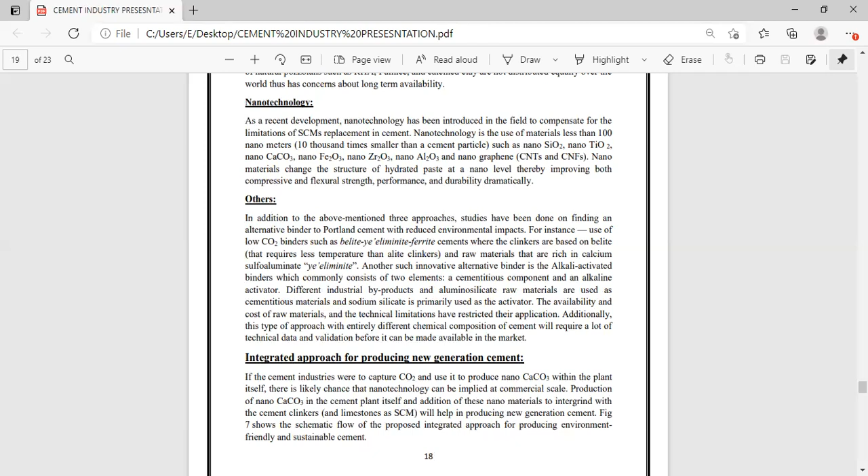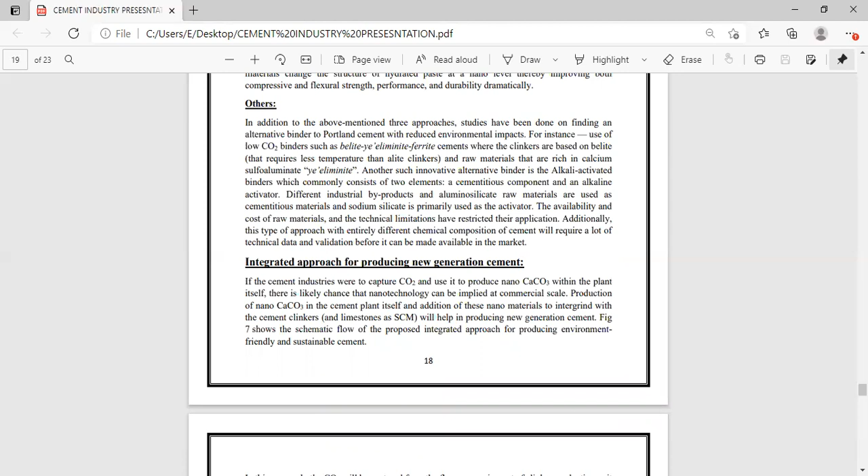Integrated approaches for producing the new generation cement. If the cement industry were to capture the carbon dioxide and use it to produce nano calcium carbonate within the plant itself, there is a likely chance that nanotechnology can be applied at commercial scale. The production of nano CaCO3 in the cement plant itself and the addition of this nanomaterial integrated with the cement clinker will help in producing the new generation cement. This figure shows the schematic flow of the proposed approach for producing eco-friendly cement.

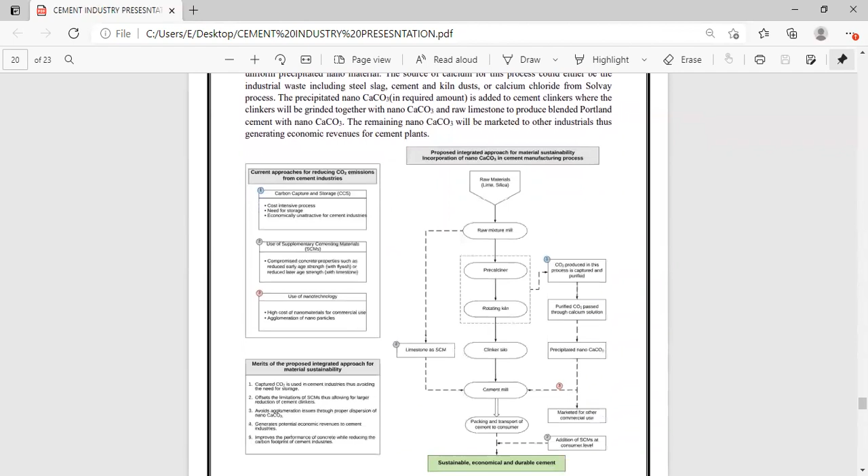In this approach, the carbon dioxide is captured from flue gases coming out of the clinker production unit; the captured and purified carbon dioxide will pass through manufacturing chambers where precipitated nano calcium carbonate is produced via chemical synthesis using a bottom-up approach. The bottom-up approach will utilize the immediate carbon dioxide, in contrast to additional carbon dioxide emission using top-down approaches where an energy-intensive process is used for fine grinding of limestone.

In the bottom-up approach, nano calcium carbonate is produced by passing pure carbon dioxide through a continuously stirred aqueous calcium solution, thereby producing more efficient and uniform precipitated nanomaterials. The source of calcium for this process could either be industrial waste, including steel slags, cement and kiln dust, or calcium chloride from the Solvay process.

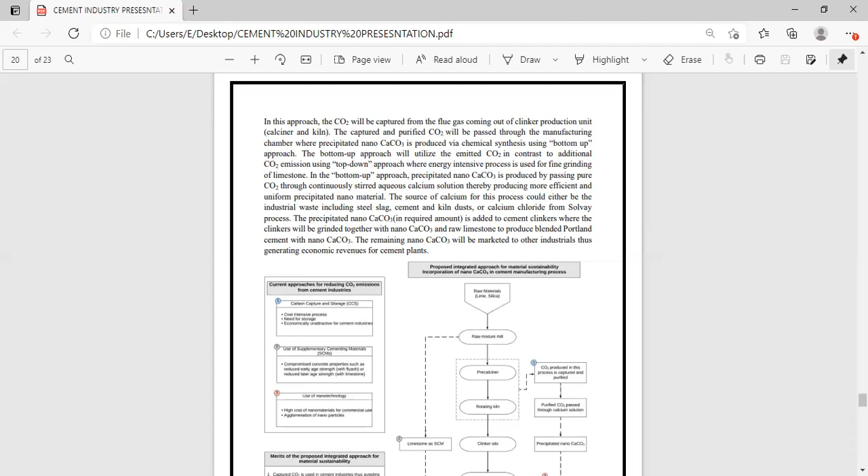The precipitated nano calcium carbonate is added to cement clinker, where the clinkers will be ground together with the nano calcium carbonate and limestone to produce a blended Portland cement with nano calcium carbonate. The remaining nano CaCO3 will be marketed to industry, thus generating economic revenue for the cement plant. This is a schematic flow of the proposed integrated approach for producing the next generation cement.

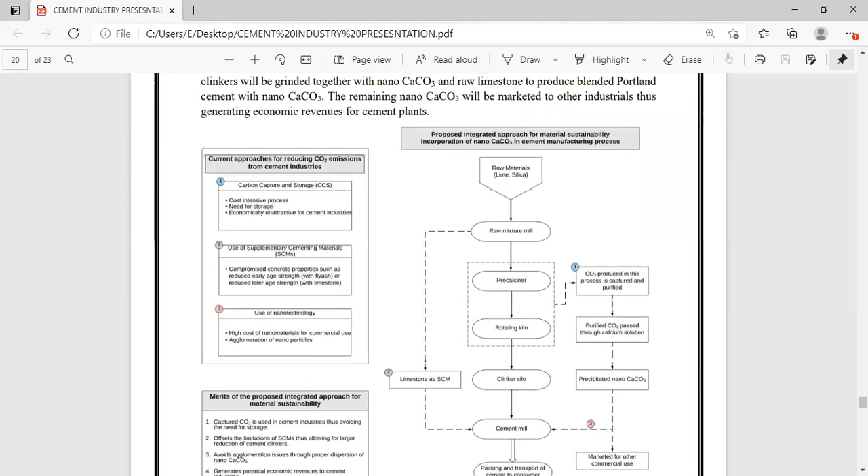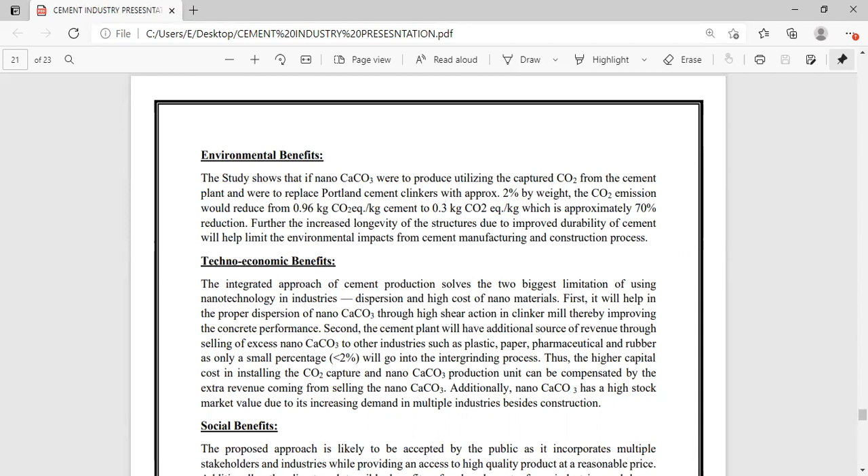Then, environmental benefits. The study shows that if nano calcium carbonate were produced utilizing the captured carbon dioxide from the cement plant and were to replace Portland cement clinker by approximately 2% by weight, the carbon dioxide emission would reduce from 0.96 kg carbon dioxide per kg cement to 0.3 kg carbon dioxide, which is approximately a 70% reduction. Further, the increased life of the structure due to improved durability of cement will help limit the environmental impact from cement manufacturing and construction processes.

Techno-economic benefits. The integrated approach to cement production solves the two biggest limitations of using nanotechnology in industries: dispersion and high cost of nanomaterials. First, proper dispersion of nano calcium carbonate through the high shear action in clinker mills, thereby improving concrete performance. Second, the cement plant will have an additional source of revenue through selling excess nano calcium carbonate to other industries such as plastics, paper, pharmaceuticals, and rubber, and only a small percentage will go into the intergrinding process.

The high capital cost of installing carbon dioxide capture and nano calcium carbonate production units can be compensated by the extra revenue from selling nano calcium carbonate. Additionally, nano calcium carbonate has a high market value due to its increasing demand in multiple industries besides construction.

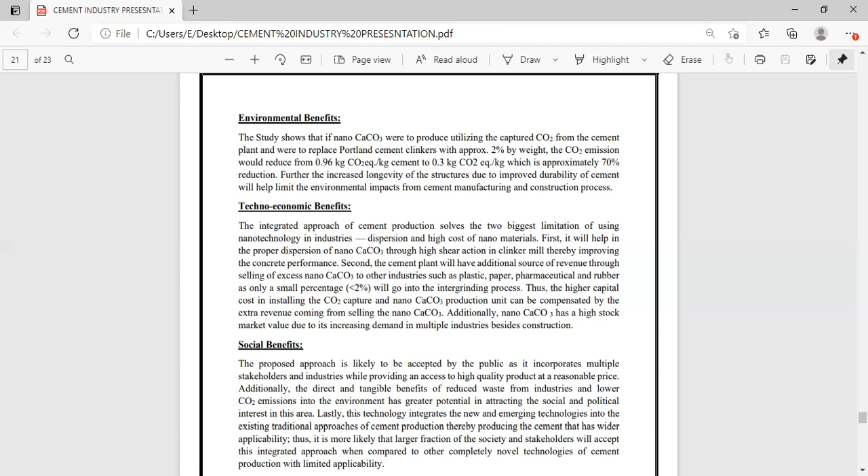Then, what are the social benefits of using nanotechnologies? The proposed approach is likely to be accepted by the public as it incorporates multiple stakeholders and industries while providing access to a high quality product at a reasonable price. Additionally, the direct and tangible benefit of reduced waste from industries and lower carbon dioxide emissions into the environment has greater potential in attracting social and political interest in this area.

Lastly, this technology integrates new and emerging technologies into existing traditional approaches of cement production, thereby producing cement that has wider applicability. And it's more likely that a larger fraction of society and stakeholders will accept the integrated approach when compared to other completely novel technologies of cement production with limited applicability.

The integrated approach thus, first, avoids the need for storage of captured carbon dioxide, as it will be utilized within the cement plant for the manufacture of nano calcium carbonate. Second, it offsets the limitation of SCMs, allowing for a larger reduction of cement clinker and thereby reducing carbon dioxide emissions. Third, it avoids agglomeration issues through proper dispersion of nanomaterials. Fourth, it generates potential economic revenue for the cement industry.